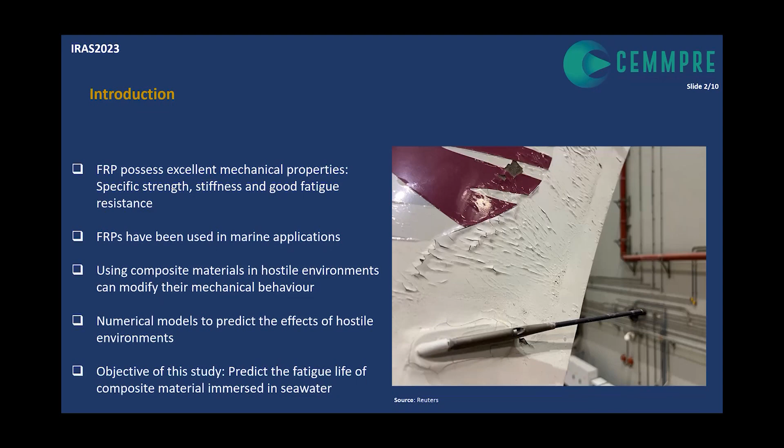So in this work, we studied the effects of the marine environment on composite materials, and rectangular samples made of epoxy reinforced with E-glass were immersed in seawater and tested after periods of 230 days and 910 days of immersion. Tensile, static, and fatigue tests were performed, and digital image correlation was used to acquire the strain fields at the specimen surface.

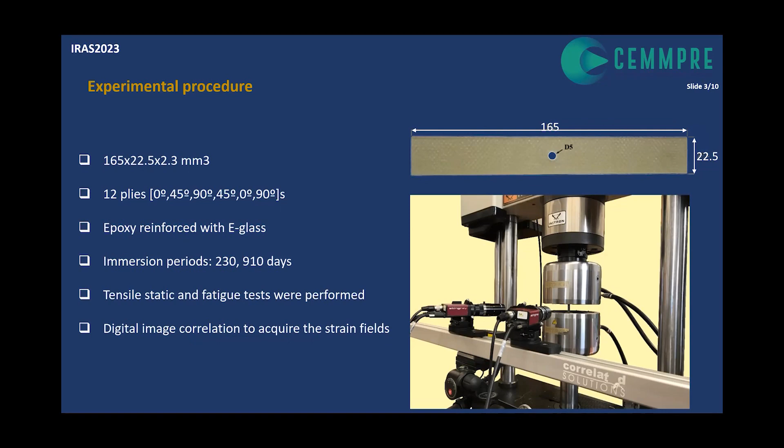So we know that seawater negatively affects the material, and in previous works, we developed a numerical model for predicting the static behavior of these materials after immersion. What I will explain today is how we use the model that we have developed for predicting the fatigue life of these composite materials. So concisely, the developed model is a three-dimensional progressive damage model implemented by combining Puck's failure criterion and Fick's second diffusion law to simulate the stress-strain response.

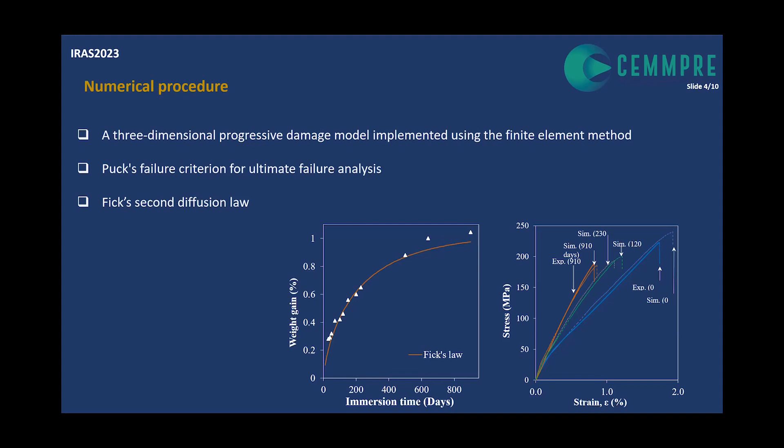And the question is, how can we use the static behavior of a laminate to predict the fatigue life of an immersed sample? So here we have the S-N curve of an unaged sample represented in red, and one S-N curve of an immersed sample represented in orange. So from an engineering point of view, obviously a control sample has a higher fatigue life NF2 than that of an immersed sample if both experience the same solicitation A.

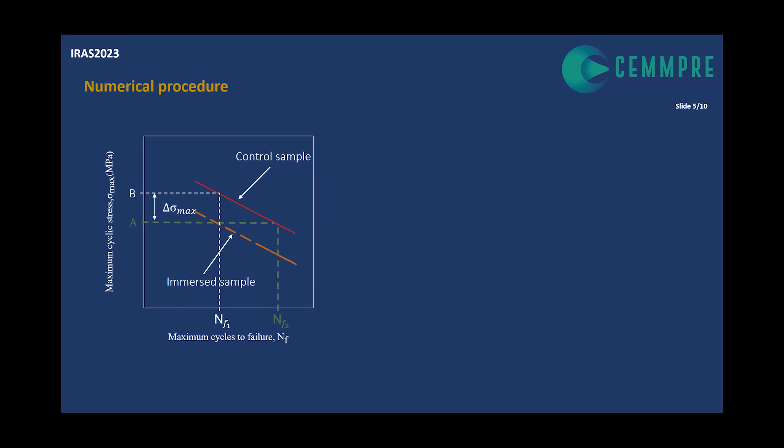Okay. So how can we acquire the S-N curve of an immersed sample from the S-N curve of the control sample? Well, the fatigue life of the immersed sample, NF1, can be obtained if we apply the loading conditions B in the control sample's S-N curve. But how can we get the loading conditions B? So B can be obtained by knowing the value of delta sigma max, which can be estimated using an energy-based consideration from the stress-strain curves, which I showed previously.

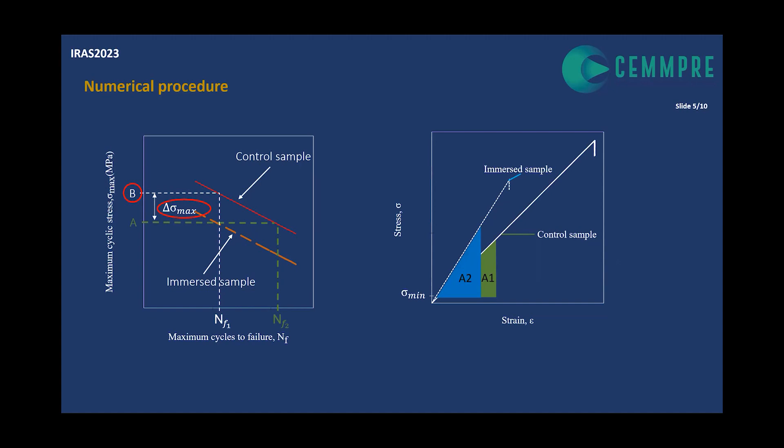So basically, what we do is we calculate the strain energy density between the minimum and maximum stress of the fatigue life in the stress-strain curve. Having the strain energy of the control sample, we then obtain the stress level for which the strain energy of the immersed sample is equal to that of the control sample. So A1 is equal to A2. Then knowing the value of delta A, we can obtain the unknown value required, basically knowing the loading conditions B through this equation.

So now what we have, very concisely, was a methodology to calculate the fatigue life of an immersed sample through the control sample S-N curve. So what we need is always the S-N curve of the control sample and the static response, which can be simulated with a numerical model.

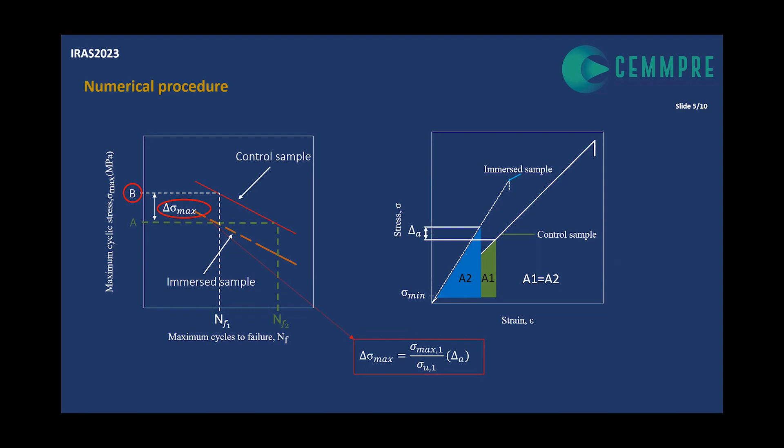So regarding the results, firstly, the experimental results show a significant reduction of the fatigue life. So for instance, at the maximum cyclic stress of 143 megapascals, the fatigue life of samples immersed for 230 days was about 66% of that of the control samples. This reduction was raised to 95% for samples immersed for 910 days.

So in this graph on the left, the dashed lines represent the predicted results, and in the graph on the right, we have those same dashed lines, and we also have some solid lines which represent the mean curves obtained with linear regression from the experimental data. So overall, the numerical predictions were very satisfactory for either 230 days or 910 days of immersion. In the former case, the S-N curve is slightly conservative, which is positive from an engineering point of view, while in the latter, the numerical results were well balanced throughout the entire range.

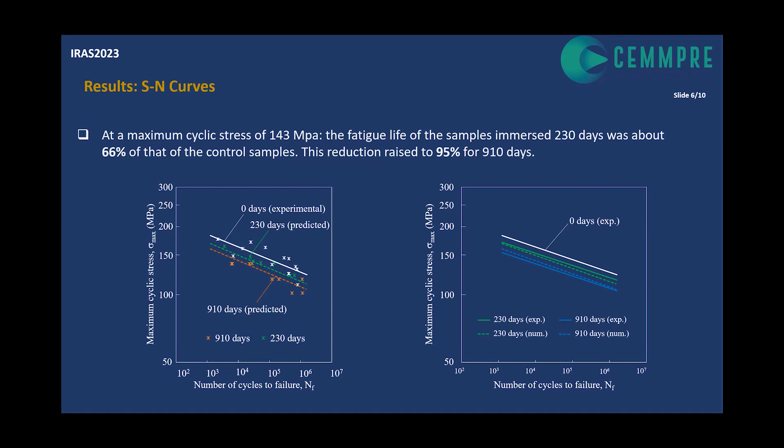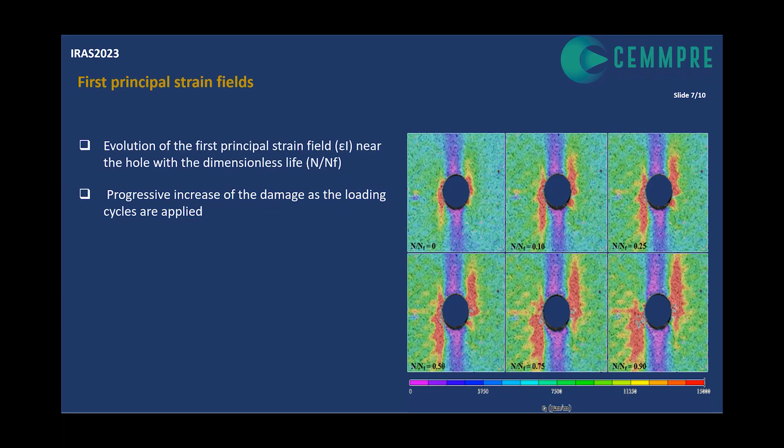So in this slide, we have the evolution of the maximum first principal strain around the hole with the number of cycles. This was recorded using digital image correlation. These results clearly show a progressive increase of the damage as the loadings are being applied. It also can be seen that damage patterns are similar for all cases, and we can see an asymmetry in the strain fields, although the loading was uniformly applied on the surface. This asymmetry is caused by two layers of unidirectional laminates oriented at an angle of 45 degrees relative to the direction of the loading.

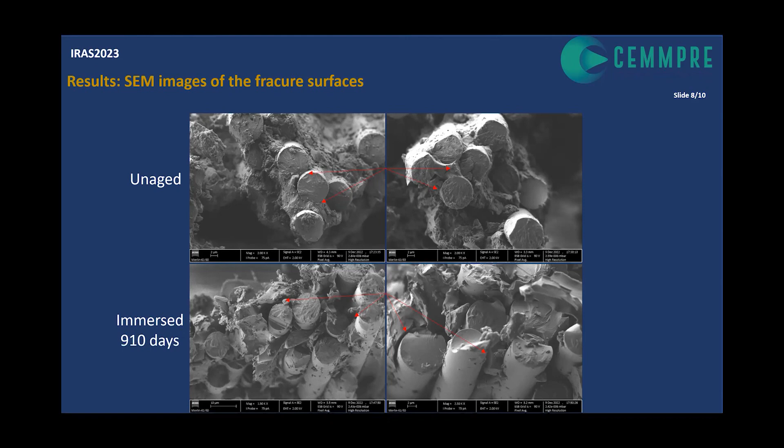So for concluding, the seawater immersion had in fact a detrimental effect on the fatigue performance of the composite tested. The proposed fatigue life prediction model captured the trends found in the experiments, and it simply requires the S-N curve of the control sample and the tensile tests of the control sample or immersed sample, which can be simulated numerically. Lastly, by improving the fiber and matrix bonding, we could enhance the fatigue performance of glass fiber reinforced polymers in marine environments. Thank you for your attention.